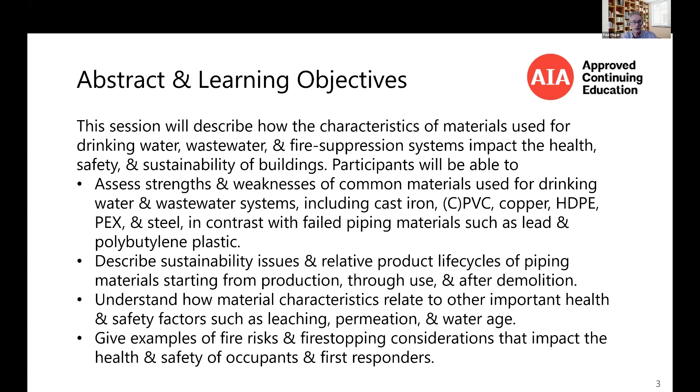So let's get started. We all know that plumbing and piping systems contribute in many ways to building performance. Today, though, we're going to focus on some issues that don't always get the focus they deserve: the effect of pipes on building sustainability, human health, and safety.

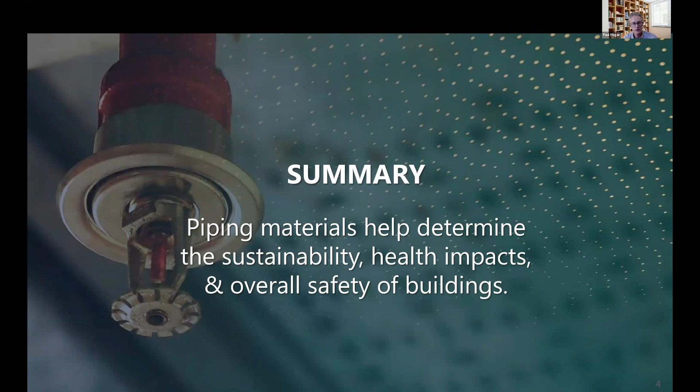A while back, an architect told me he spent more time thinking about urinal dividers than he did about piping. I guess that's understandable, but it's not really what we want to hear. So here's your key takeaway: research shows that the types of pipe you use really do matter for building sustainability, health, and safety.

We're going to cover the information today by going through 4 main sections. Each of them has some subtopics, and we're going to start with a quick overview of just plumbing systems to level set on what we're going to focus on.

So the 3 applications we focus on are supplying water for drinking and sanitary use, providing drain, waste, and vent systems to safely transport waste away from the building, and reducing risks from fires with sprinkler systems. There are, of course, other types of pipes in buildings, whether it's natural gas, heating, or electrical conduit, but we're not going to focus much on those today.

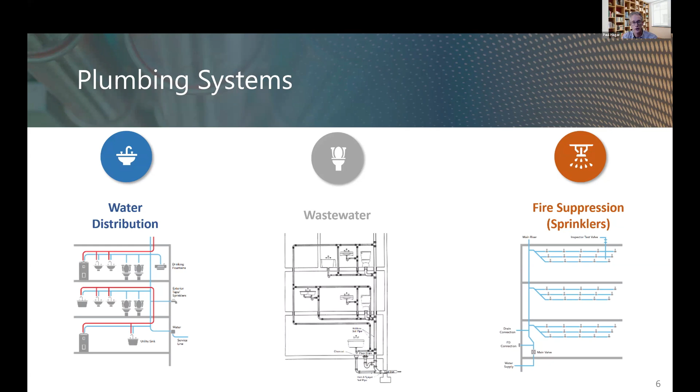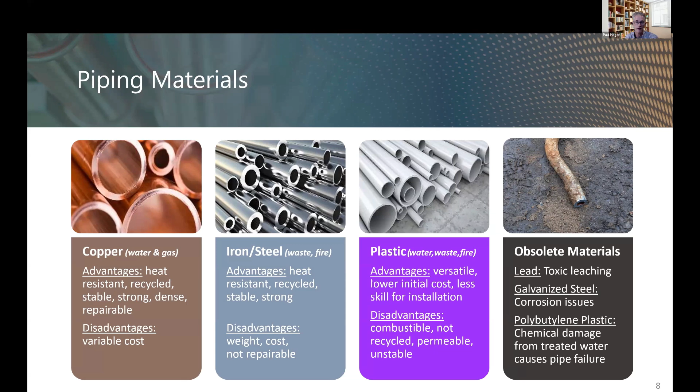Lead, of course, has received lots of attention over the last 10 years or even before that, as various communities have struggled to deal with the toxic impacts of lead leaching. In the US, polybutylene pipes had a day of reckoning about 30 years ago, when weakness in the plastic started creating leaks. I think Australia is still dealing with that today. Galvanized pipes also pretty much qualify as a failed material because of the incidence of corrosion and failure associated with that.

We need to also discuss the various plastics used in pipes, because there's a lot of different flavors. The main types used for building plumbing systems are shown here: CPVC, PVC, HDPE, PEX, and ABS. There's a quick table here that shows you some of the ways they're applied in buildings, as well as

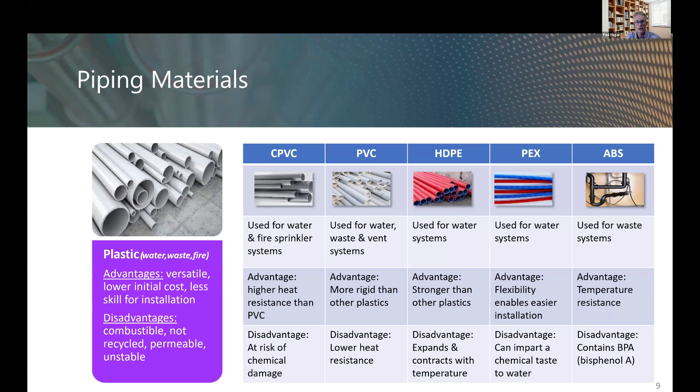a quick hit on what their advantage is and what one disadvantage might be. We're going to cover this in more detail again in later slides.

So with that basic setup, now let's look at sustainability considerations. You may have heard that the construction sector is responsible for about 30% of the world's energy use and emissions, but construction is also responsible for a huge portion of resource use globally. For example, it's the second largest consumer of plastic and produces 17% of the world's plastic waste.

If we want to become more sustainable, we've got to keep improving the design of how we build homes, schools, and workplaces.

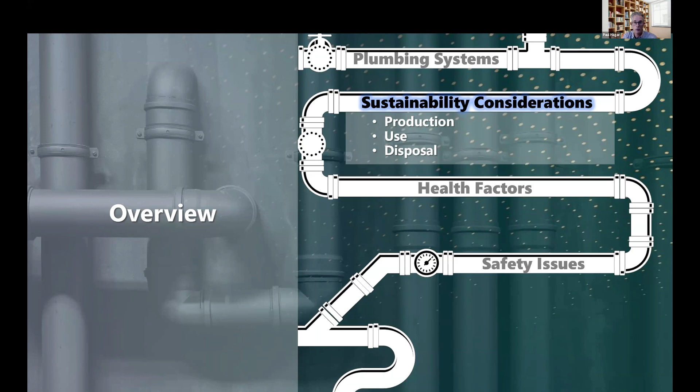The UN's been looking at this issue for decades. In 1987, almost 40 years ago, they described sustainability practices really nicely, making sure that in the future people will be able to live productive, healthy lives. That means moving away from things produced in a linear way, just consuming materials and creating trash, and toward circular processes. I'm a little more charged up on this today than I would be normally because I just got back from Greenbuild, and it's amazing to see all the people doing great work on this front.

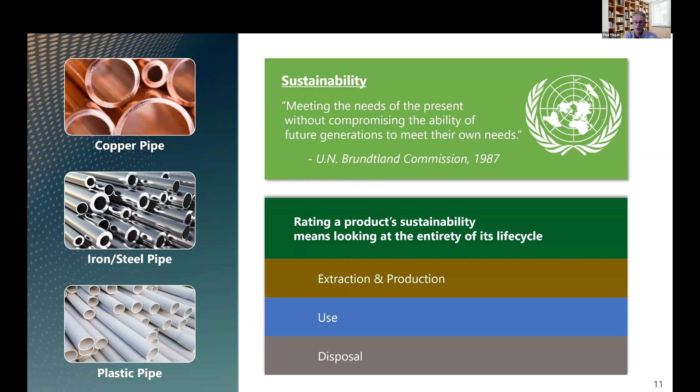To understand what this means for piping and how the various types stack up, let's take a look at what happens at all stages of this life cycle, from making the materials through installation and operation and after use. We'll do this on a material by material basis, starting with copper.

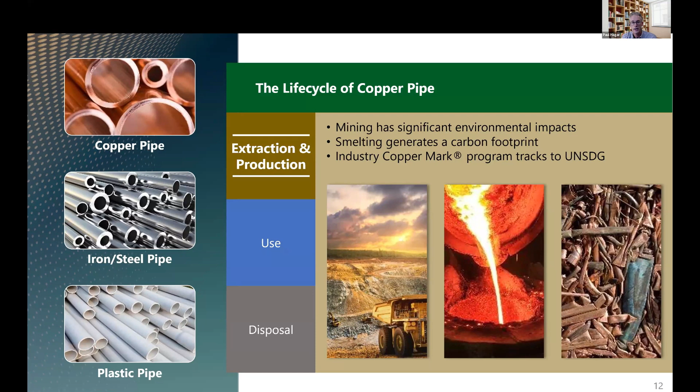Copper has been used for hundreds of years in plumbing. Like all metals, mining and smelting impacts the environment by disrupting the areas around mines and generating tailings and other waste products. There's a huge carbon footprint associated with refining that ore and producing the pipes. As we'll see in a minute, however, once that copper is made, it can essentially be used forever. Major copper producers have done a nice job committing to publish their progress against UN Sustainable Development Goals, and implemented an independent Copper Mark program to track their progress.

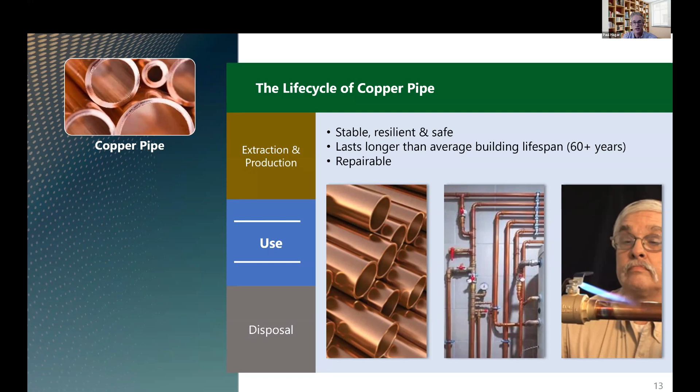In use, copper piping performs really well. It lasts decades, often longer than the life of the building in which it's installed, and it's pretty stable and also repairable, because you can solder and braze copper, making it possible to just take out a piece or replace a piece if necessary. Its strongest point is probably what happens at the end of use.

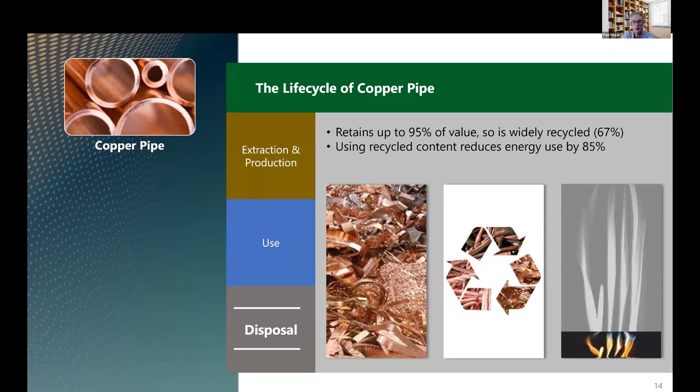This graphic on the right is meant to indicate the full energy associated with producing copper. Here's what happens when that copper is recycled: that energy footprint is reduced by about 85%. It's estimated about two-thirds of all copper ever extracted is still in circulation today.

The life cycle of iron and steel pipe is pretty similar to copper. Mining and refining has impacts and produces a carbon footprint. The heavier weight of iron and steel pipe also adds to that footprint because it increases the energy used to transport it.

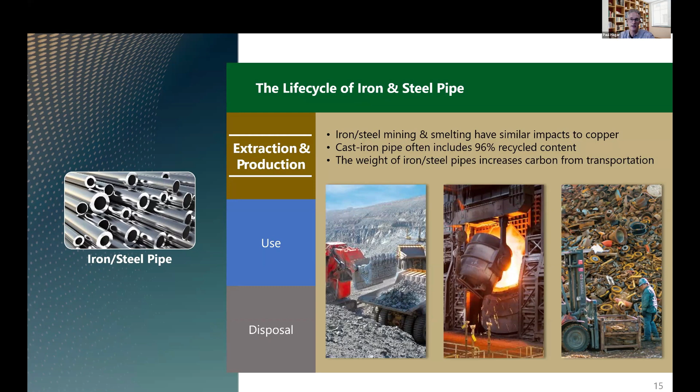Also, like copper, however, the industry has engineered processes to gather pipes, reclaim the materials, and use them again. Percentages of recycled content, at least in domestically produced cast iron pipe, range up to 96%.

Also like copper, it's a pretty stable material. An actual advantage of the heavier weight of cast iron is its structural strength, so a lot of these pipes get buried or put under foundations or in parking garages. That makes them more resilient to things like impact or compression.

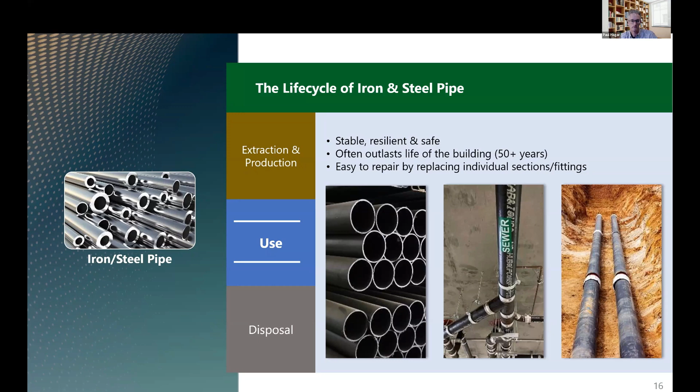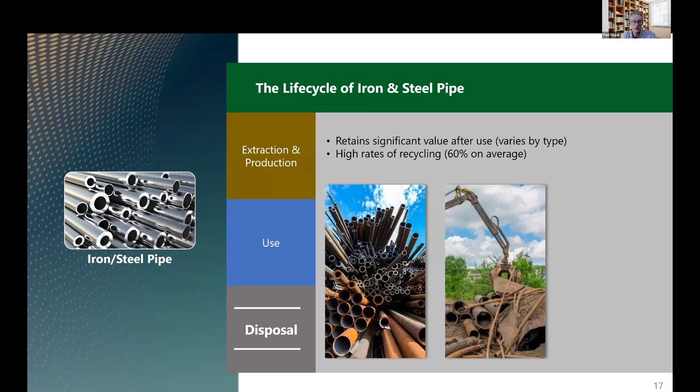At the end of life, steel and iron pipes are two of the construction industry's most widely collected and reused materials. Recycling rates stand above 60%, according to the Iron and Steel Institute. The price per ton varies more than copper, but it's still significant, so people do recycle it.

Finally, we'll take a quick look at plastic pipes. Again, the first part of this story has a lot of impact, just like for metals. Extracting natural gas or oil used for feedstock has big impact, especially on fence line communities like Louisiana's infamous Cancer Alley.

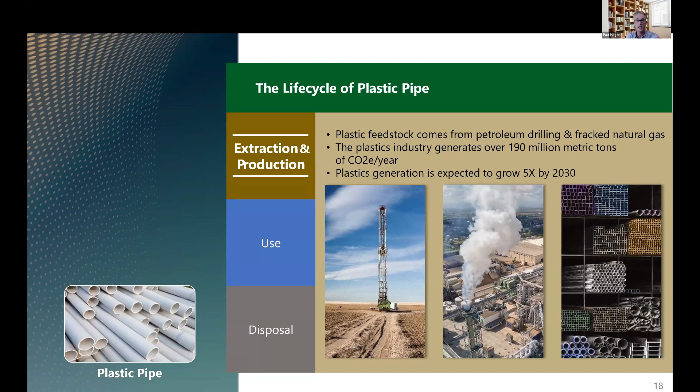Plastic comes from fossil fuels, and once it goes into production, there are also problems, especially with PVC, because the production of PVC has been associated with forced labor practices in the Uyghur region of China. Plastic manufacturing has exploded over the last 30 years, and the UN projects it's going to expand a further 5 times just by the end of this decade. What is that going to mean for the carbon footprint, and what is it going to mean for plastic waste? Those are some things we should be thinking about.

In use, the many types of plastic make it a little more difficult to ensure they are installed and maintained according to manufacturer requirements. We'll talk about that again in a few slides. Also, because plastic pipe is combustible, it has to be installed with more protection against fire risks, and we're going to talk about that as well.

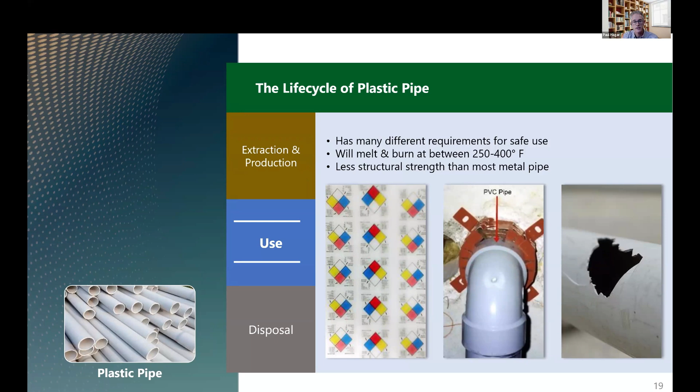Here's the most significant difference of plastic pipes at the end of product life: virtually all plastic is engineered for single use. That includes building materials. The recycling rate for plastic pipes isn't 2/3, it's not 60%, it's virtually 0. So all that plastic either gets landfilled, adding to plastic pollution, or gets incinerated, increasing carbon emissions.

You might have heard claims from some plastic building materials manufacturers that the embodied carbon of plastic is actually lower than that of some metal products. I think they've reached that conclusion by excluding all the pre-production impacts of their material, and all the post-use impacts on the environment after it gets into landfill or gets incinerated.

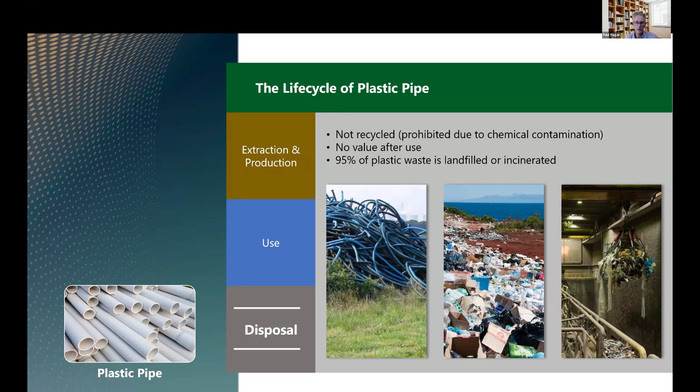So this is the real area of difference. Copper, iron, and steel are circular by their nature, and they actually are handled in a circular manner by and large. As plastics are engineered and produced today, pipes made of PVC, PEX, and other plastics are just not circular at all. They're linear.

During use, plumbing systems need to ensure water quality is sufficient to protect human health. The two pieces of research we track most significantly are leaching from pipes into water and the increasing aging of water inside pipes. So we'll take a look at that.

Chemical interactions between piping materials and water, typically this is oxidation or chemical reactions, means all pipes leach substances into water to some degree. Some materials are safer than others, and there are tools out there that rate that level of safety.

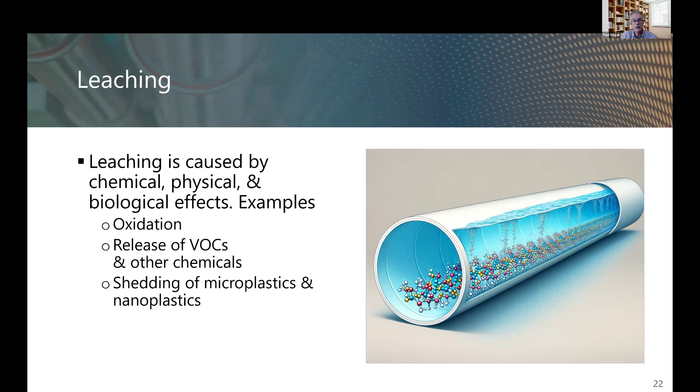I can name one, happened to have been on a webinar this morning from a company or organization called Habitable, habitablefuture.org. They had a really nice presentation on plastic building materials in buildings. There's also a tool called Red to Green by a company called Materially Better. They do a nice job of scoring and ranking different materials against each other, not just piping, everything. Take a look at either one, and I'm happy to share information on those later.

So we'll start with kind of the poster boy for leaching on this front: lead. It's obviously emerged as a serious public health threat. Flint, Newark New Jersey, Washington D.C., Chicago, and many other communities across the country have been affected by lead leaching. It's not as prevalent in California, you guys have a lot more plastic out in your region, but it's still a really significant problem for individual families, companies, and communities to deal with.

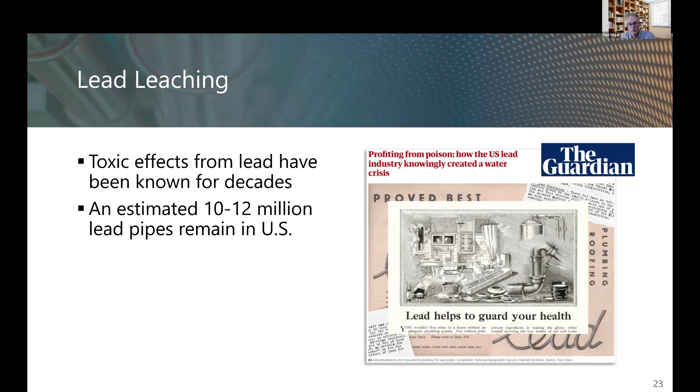That's one of the reasons the Bipartisan Infrastructure Law earmarked about $15 billion to replace these lead pipes.

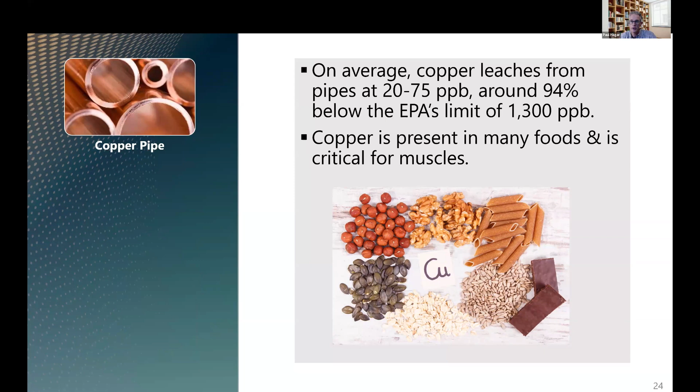So let's take a quick look at the other forms of leaching that occur from pipes. Copper does leach at relatively low levels, about 94% lower than what the EPA considers an unsafe limit. Also, copper is present in a lot of nuts and chocolate, et cetera, and it plays a role in muscle function. So for most people, the exception being folks with a syndrome called Wilson's disease, you don't have to worry much about copper exposure because your body just flushes it out.

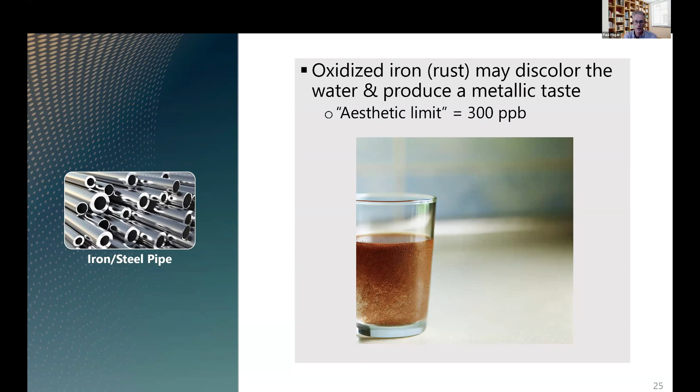Similar story for iron and steel. They may begin to corrode at some point during use, and if there's a disruption to piping systems, like construction or renovation, you can end up with brownish water. The industry calls the limit on iron an aesthetic limit because it ends up with this nasty brown color. At super high levels, if someone was taking an iron supplement and drinking brown water, they might get sick to their stomach.

Turning now to plastic, microplastics are getting increasing attention as an emerging contaminant in water. A recent paper looking at plastic pipes out of Europe looked at microplastics exposure coming from plastic pipes after water treatment, as water was flowing to homes and other endpoints of use. They found that chemical interactions with water, or microbial activity, produced pitting on the inside of plastic pipes and shed significant releases of plastic particles into drinking water.

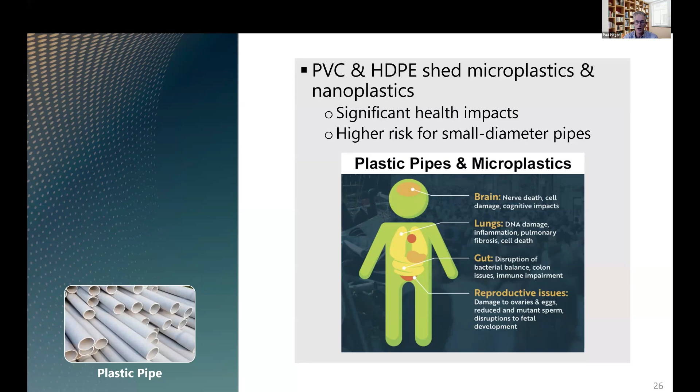A report on this research that's on our website looks at a summary of this research, gives you images from the paper itself, and talks about associated health studies on the effects of microplastics on the gut, lungs, nervous system, and reproductive system as well.

Leaching from plastic pipes, in this case chemical leaching, is well documented. CPVC, HDPE, PVC and PEX plastic pipes are made of complex blends of hydrocarbons, chemicals, and other additives to make them stable, to put color in them, to make them UV resistant, et cetera. These chemicals do leach from pipe walls over time. Gradient published a study in 2018 cataloging 163 leachates, substances that come out of the pipe and go into water, including VOCs, SVOCs, endocrine disruptors, and carcinogens.

A troubling trend we as humans are seeing is that as our exposure to chemicals increases, one symptom of that effect is that researchers are seeing severe reductions in sperm count over the decades, and those reductions correlate roughly to the increase in plastic use in our daily lives. Of course, we can't say how much of that comes from plastic pipes, but there's an additive effect, and we should be thinking about that.

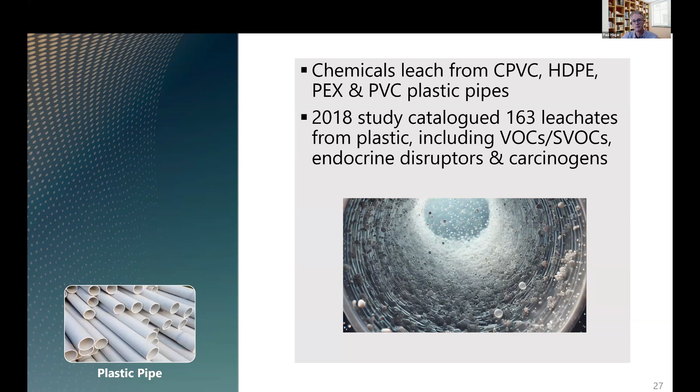Now let's turn to water aging. This is another emerging topic of discussion in the plumbing industry, and here's why.

A lot of the standards that were created for sizing of pipes to provide adequate volume of water to fixtures and appliances in buildings were created decades ago, and they essentially haven't been updated since.

So water engineers are increasingly finding that potable water is aging beyond the 24-hour cycle and the 19-day test period specified by NSF ANSI 61, which is the standard used to measure the safety of materials used in pipes.

Ironically, this challenge is actually exacerbated as buildings get smarter about how they use water, because now we have low flow fixtures, we're specifying appliances that are extra efficient with water.

So what this means is if you have an issue with the way your water system is designed, or if you have a building that's used only intermittently, think of a school or a vacation home or something like that, if they're sitting idle for periods of days, weeks, and months, that can be a problem.

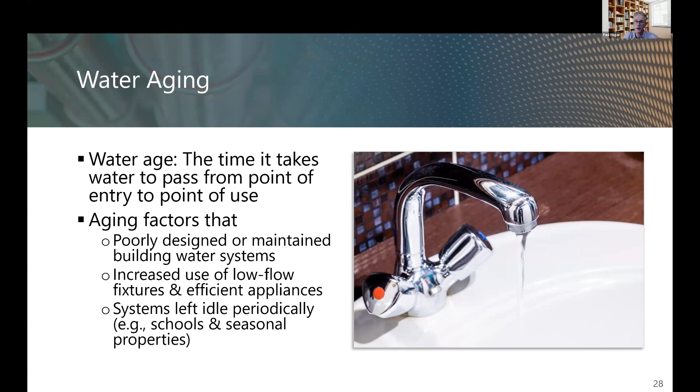So IAPMO, which is the International Association of Plumbing and Mechanical Officials, is increasingly calling now for, and they've created a tool, which I'll share in a second, that basically says you can downsize pipes and you should be downsizing pipes to make sure that the water is not over aging in a building.

Here's why: you get this increased effect of leaching as water sits in the pipe. It also gives a chance for microbes to grow more.

So I think one illustration of this is that there was a spike in Legionnaire's disease as we transitioned out of the pandemic and the shutdowns associated with that.

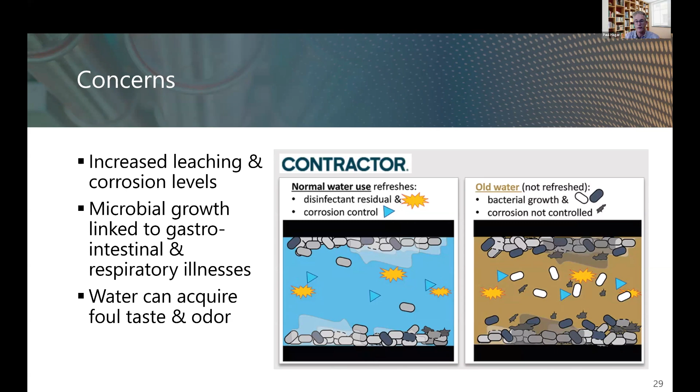I think unaddressed, either of these problems can cause, at the very least, taste and odor issues if you ever had that fishy taste or smell from water. But if it's carried further and the water doesn't get flushed out, it can threaten the health of occupants.

Here's that tool I was talking about before, the iapmo.org water demand calculator. They published these new sizing standards way back in 2018.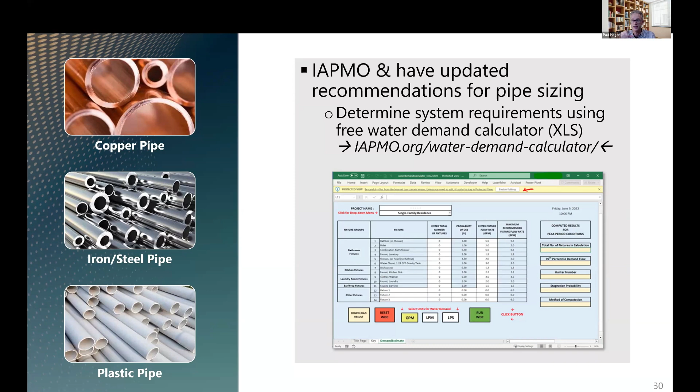I think it's an interesting thing for you guys to look at because smaller diameter pipes, number one, they cost less, they require less support, and it will actually aid performance of buildings, safety of buildings, because it's going to allow the water to flow through more quickly.

So our last two topics that we're going to talk about before we open up for questions deal with building safety. I end with this one because it's the one that kind of takes the most time and is in many ways the most important.

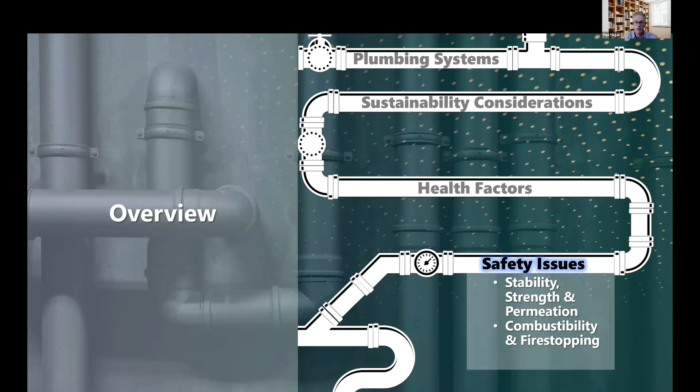So we're going to take a look now at how pipe materials react differently when accidents or disaster impacts happen in and around buildings.

So some of the most serious damage from piping failures can come from chemical compatibility problems. If you think back to what we were talking about in terms of failed plumbing materials, this was the issue that killed polybutylene pipes. They had interactions with chemicals.

The polybutylene plastic had interactions with chemicals that created brittleness and stress cracking. And basically these pipes failed from the inside, and all of a sudden people had major leaks in their homes or in office buildings, et cetera.

So these incidents, though, can occur from many different sources, and they're affected by a bunch of variables. Could occur from maintenance, could occur from a building occupant if they're putting something nasty down the drain. And what ends up happening is that over time, these pipe materials get impacted, they start wearing away, and the impacts vary again by the type of material.

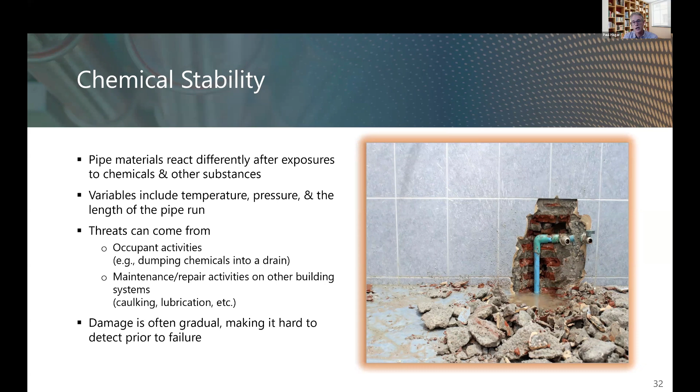So again, talking about piping materials, it really does matter for this kind of system. We're going to go through each one.

Copper pipe is susceptible to pitting from water with aggressive alkaline chemistry. So here you can see kind of a cross section and this rough surface on the inside. Primarily, this aggressive alkaline chemistry occurs in the West - Southern California, Arizona, and Utah.

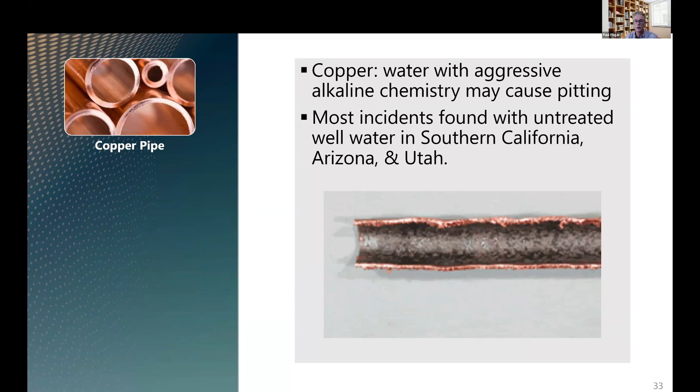Most municipal water systems, commercial water systems, are going to be treating for this and mitigating that factor. But for untreated well water or small private water systems, sometimes they don't manage this well. I'm aware of at least one incident in Steamboat Springs, Colorado, where a major hotel has had pinhole leaks from copper because they didn't treat the water correctly.

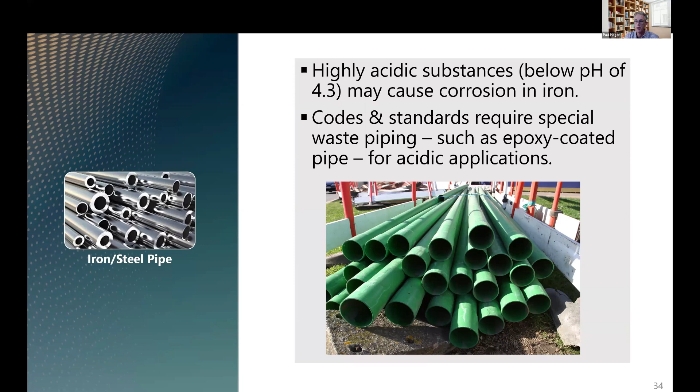Iron and steel pipe is probably even more resilient to damage from the chemistry of water than copper. Both these things are pretty stable, but in extraordinary circumstances they can be damaged. The one instance where iron needs to be protected is in a highly acidic application, like an industrial application. Here you can see a batch of epoxy coated cast iron pipes.

Plastic, because there are so many different flavors, varies in its chemical stability, just like it varies in the best way to use it or its resistance to temperature. This means you have to really know what material type you're looking at, and even what subtype. Is it PEX A or PEX B? What type of PVC is it? For each type of pipe, manufacturers list dozens of substances you should avoid in how you install and what you use around and put through these pipes. The lists are far too many to go through today, but I'll give you a quick sample.

What's also hard to judge is that the speed and degree of damage done can vary a lot too, so there's no rule of thumb. You just have to be generally careful. Bottom line, the construction teams, the installation teams, your subs have got to be pretty careful, and the maintenance teams also have to be instructed to be careful. I'll talk about an example of some Miami condominiums where this caused a problem.

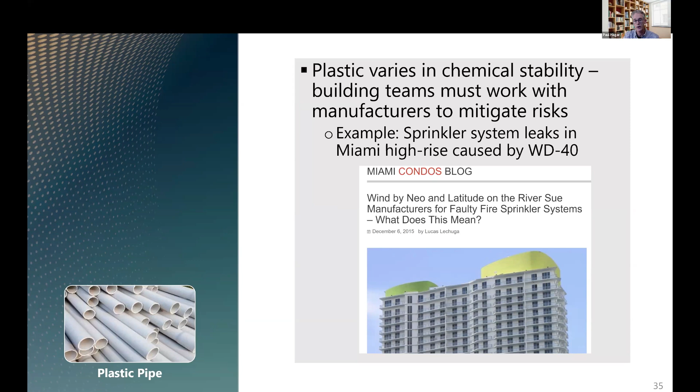Here's a quick summary of things that can affect the integrity of plastic piping. Chemicals used for termite treatment or mold abatement can cause brittleness or stress cracking. Other commonly used substances like caulk, solder flux, spray foam insulation, HVAC chemicals, fire stopping products, thread sealants, primers, and cleaners can be issues. If you're thinking about plenum spaces and why that might be an issue with some of these materials, yes, that's a concern, because plenum spaces are tight and it's easy to have a problem.

Other strong solvents, oxidants, acids, bases, and halogens that affect metal pipes will also affect plastic pipes in general. If plastic pipes are stored incorrectly outside, or even sitting on a truck outside for a long time, some types will be affected by UV, weakening them. That's especially important for long runs of plastic pipe, to make sure they're adequately supported.

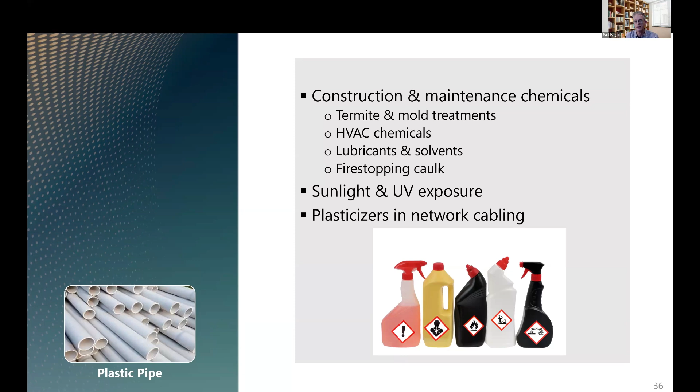One thing I learned from an architect at one of these presentations is that he ran into a problem with network cabling. A sub had all the piping installed nicely through the walls, and a sub came in to install network computer cabling and said, here's my holes, I'll just run my cabling straight through those. But network cabling has to be really bendy, so it has a lot of plasticizers in the coating. These wires ended up sitting right up against the pipes, and over time the plasticizers ate through the pipes, creating wormholes and leaks and lots of problems.

Switching from chemical compatibility to material strength, thermal effects can represent another form of stress placed on piping materials. Expansion and contraction with long pipe runs at various temperatures can affect joints and fittings. It can also affect fire stop brackets as these pipes try to move as they get warmer or colder. We'll talk more about fire stops in a minute.

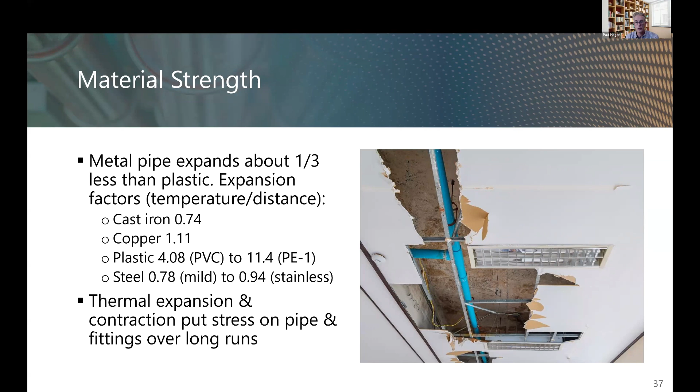Looking at this on a material basis, cast iron performs best, followed by steel and copper. PVC and PE, being less dense materials, expand and contract much more significantly. What this means for you is that when designing piping systems, especially long runs in a stack or in an unconditioned space like an exterior wall or a shaft, you need to think about what will happen to those pipes as the temperature changes during a day or across seasons. You could also consider using a more stable material in those kinds of applications.

So we're also going to talk a little bit right now about permeation. Not generally an issue inside of buildings, but if you have a multi-building campus, you might want to think about this one, because piping that connects buildings on a campus, or that runs from a building to the water mains, often passes below ground.

Might be under a street, might be through soil that contains pollutants. Research shows that some pipes allow these substances to pass through the piping walls fairly easily. This is called permeation. The graphic here shows some instances where that might happen, from a nearby industrial location, a gas station. Gas is one of the most frequently spilled pollutants that gets down into soil and water.

The EPA says risks from permeation are limited to non-metallic materials, in this case plastic, because they are porous. So if you have a building located near a manufacturing facility, a gas station, agricultural location, things like that, you might want to consider the ongoing risk from leaks or spills and specify piping materials appropriate to protect against those threats. A recent example from a year or so ago was East Palestine, Ohio.

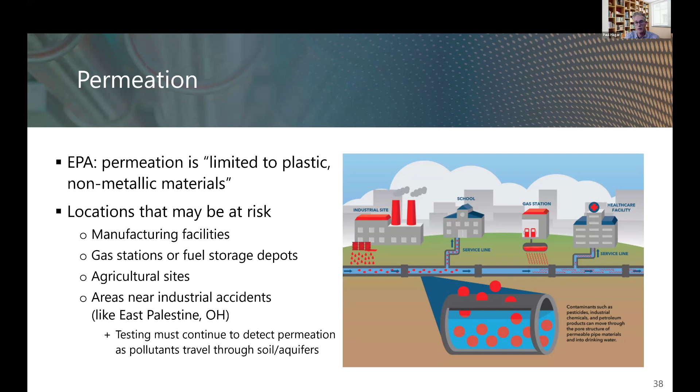So next, we're going to talk about fire. The main difference in fire risks... I'm missing a slide here. That's weird. Okay.

Generally, what I say is the main difference in fire comes down to combustibility, and that is obviously related to temperature, if a structural fire or a wildfire occurs that affects that building or a community. As a matter of reference, an average structural fire generates temperatures up to about 1,500 degrees Fahrenheit. Metal pipes are not combustible at this level, although they will obviously melt if they're exposed to very extreme heat.

By contrast, plastic pipes burn at much lower temperatures than happen in a fire, starting around 400 degrees Fahrenheit. Some plastic pipes will also lose structural integrity and start to melt before they burn. That can create other issues, including failures in exposed spaces, let's say under a sink or in walls that are exposed to heat, to flames moving up.

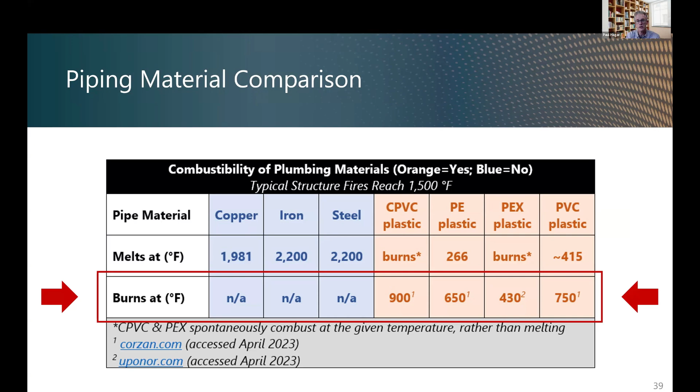We should also talk a little bit about chemical leaching from plastic pipes that get exposed to heat or that burn. One from not so far from you guys, in Santa Rosa, was a pretty good example of this in real life, where a wildfire burned several miles of a polyethylene pipe that supplied water to thousands of residents in the area. So obviously the plastic pipe burned. You can see that there.

I'm not sure why they decided to put combustible plastic pipe above ground in a wildfire-prone area, but they did.

What ended up happening is that not only did the people who were served by this pipe lose access to water for months, what they also discovered is that as this pipe burned, it leached benzene into the water, which then flowed into their homes, got on into their plumbing systems, and it either had to be, well, they tried to flush it out, but essentially a lot of these systems ended up having to be replaced.

I wish I could tell you the story had a happy ending. For some reason, the community decided after this fire to again use plastic pipe for the supply line. Hopefully they buried it this time. I guess that was a value engineering decision. I'm not sure what's going to happen the next time there's a wildfire in this area. We'll see.

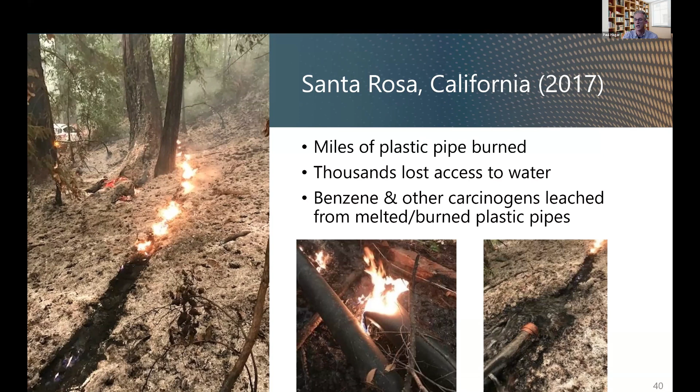This, by the way, applies across the board to plastic materials and buildings. Here's a great illustration from research showing why combustibility matters. The Fire Safety Research Institute has a couple of times done a really interesting study where they build two test burn rooms, one that contains natural materials, that's the one on the left, like metal, wood, wool, natural batting materials, natural fabrics. The other one uses more modern materials like plastic foams, polyester, vinyl wallpaper, etc.

And they do a burn test on it. Even with the fire retardants built into the plastics, the time to flash over, the time when a fire has fully engulfed a room, was 3 minutes and 48 seconds for the synthetic room. That doesn't give much time for occupants to get out, and it gives almost no time for first responders, firefighters, to get in and get that fire out. You should also notice that the smoke there is like kind of black, evil-looking smoke on the right-hand side.

This is really interesting if you can find it - there's a YouTube video that shows a time-lapse of fire catching and burning. It's pretty amazing. On one side you can see the natural room at the same timestamp was barely burning, and it didn't reach flashover for 29 minutes. That's a lot longer for the fire trucks to get on site.

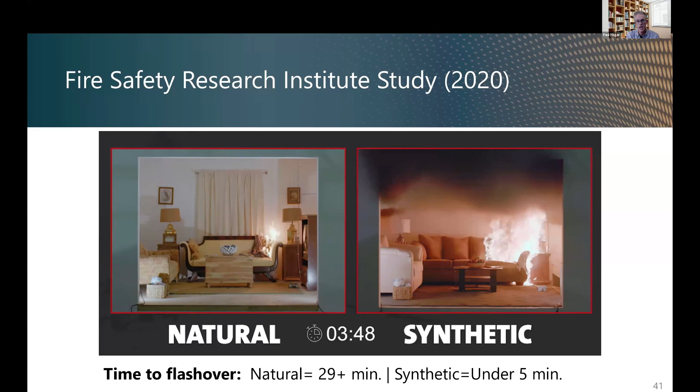The reason I say this is because plastic pipes are also made of plastic, and as we saw from the chart, they will burn. So if that starts with exposed pipes, it can spread into walls and upper floors of a structure. I'm running a little short on time, so I'll go through the next slides a little more quickly.

Here are some of the chemicals that research has found get emitted from plastic pipes when they get extremely heated or burn. You can see benzene there, which I mentioned before, carbon monoxide, formaldehyde, and nice chemicals like hydrogen cyanide, sulfur dioxide, etc.

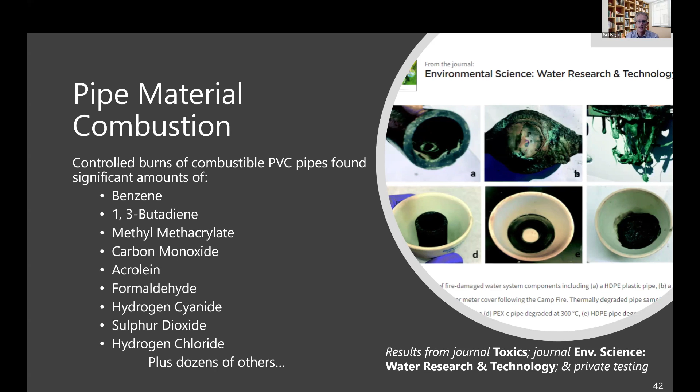Purdue has a Center for Plumbing Safety run by Professor Andrew Whelton that studies what gets released into water from melted and burned plastic pipes. When he looked at wildfire areas after the wildfire had passed through, he found carcinogenic benzene levels 40,000 times above the safe limit.

Right now, two out of three deaths of active firefighters in active duty occur from cancer, not accidents during a fire. I think that raises a question: should we continue putting this much plastic into the environments where we live and work?

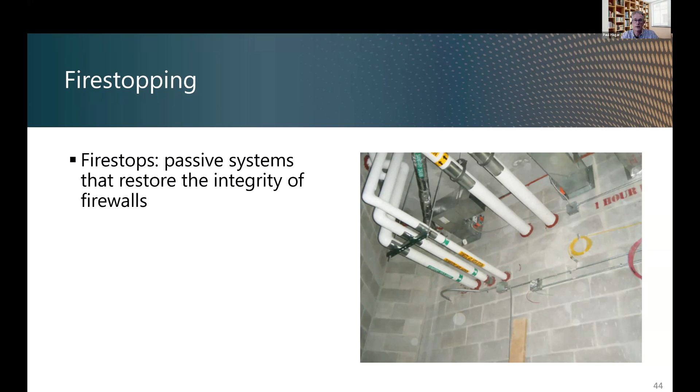I'm going to end here on the topic of fire stopping. We all know what fire stops are, but I'll give a definition: these are systems that are meant to restore the integrity of firewalls. If these devices are going to work, every single one of them needs to account for the specific materials used for the pipe, the materials used for the wall, and the situations they're designed to protect from.

Fire codes obviously prescribe exact formulas for installation, as do manufacturer instructions. In reality, I've talked to several fire stopping experts who, when they go in the field, see a lot of errors, including the one shown on this slide.

For example, here you see a PVC pipe installed with a collar, copper and steel on flanking penetrations. What's wrong with this picture is that the collar that's meant to secure this pipe to the wall doesn't have fasteners that actually attach it to the wall and keep it there. Why that's important is that inside that cavity, inside the wall - I'll show you this in a second.

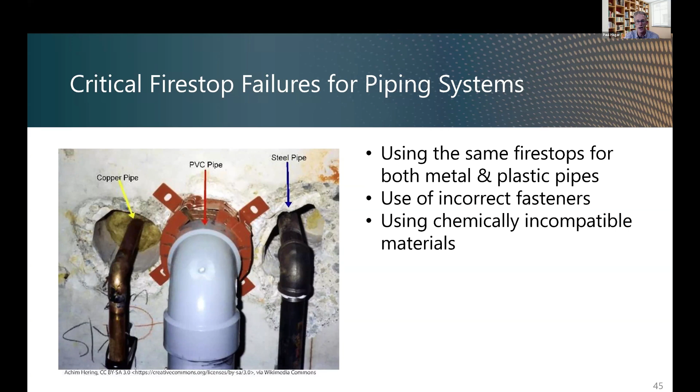Actually, I'll show it to you now. Inside that wall, this is intumescent material that, when this pipe burns and starts to heat, expands and crushes in on the pipe because it's the only area where it can close off. It can't push out on the collars if they're correctly installed. That seals off the hole and prevents the fire from passing through that penetration to the other side - to the adjacent room or adjacent floor if that penetration was running vertically.

That's different from non-combustible pipes, because in those cases, the fire stops don't have to account for the pipe burning - they only have to account for the gaps around the pipe. A fire stop for plastic pipes has to account for the entire space: the space around the pipe and the space occupied by the pipe itself.

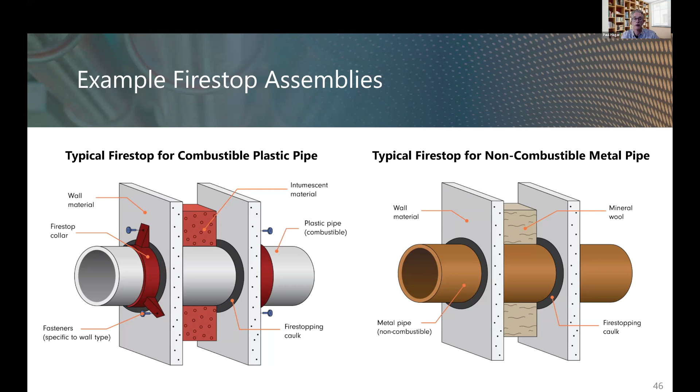These types of installations are more complicated, and in reality, fire stopping experts say they see a lot more errors with them - for example, using a drywall screw instead of a specialized fastener. That would be a good indication of an error that those guys would see.

So we're almost to the end. I've left about 10 minutes for Q&A, but I'll quickly go through a summary.

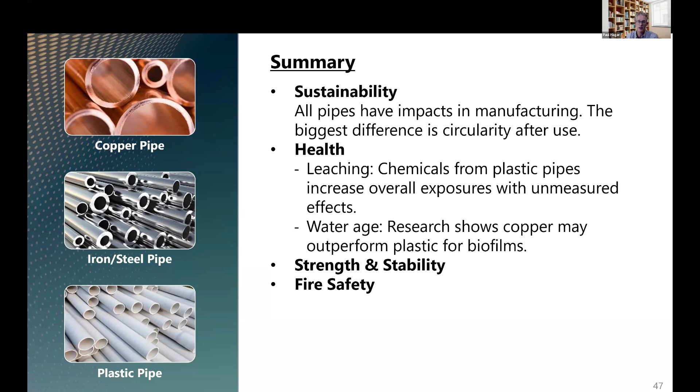The first thing to say is that all pipes have impacts in manufacturing - that was the life cycle discussion we talked about at the beginning. The biggest difference here is circularity after use. On the health side, chemicals from plastic pipes are the ones with the most serious questions around them about exposures, and in many cases the effects of those chemicals have not been sufficiently measured. We should also talk about water age and mention that copper can outperform plastic in reducing the effect of microbial growth and biofilms.

On the strength and stability side, if you've specified plastic pipes of a particular type, it's important that the subs and maintenance folks understand the risks around installation and maintenance, what substances can be used around those pipes. You also need to account for thermal issues, expansion and contraction in unconditioned spaces.

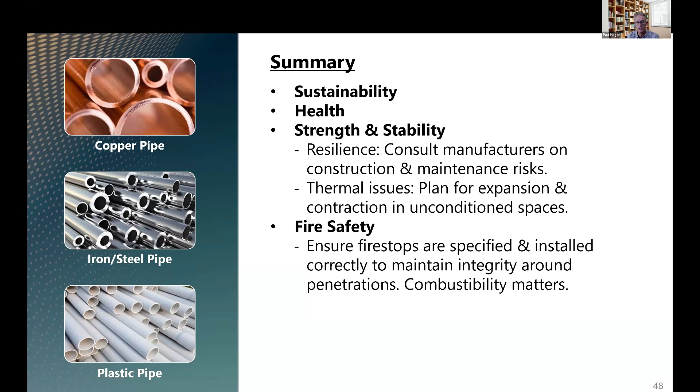And for fire safety, I already talked about this so I won't spend too much time on it, but make sure pipes are specified correctly using the right assemblies and installed correctly to maintain integrity around penetrations. In this case, combustibility really does matter.